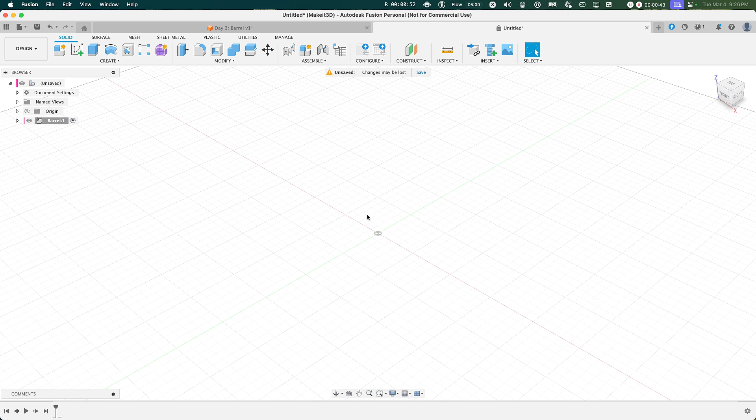So the first thing we need to do here is to create a new component. Let's hover over to the left-hand side, click on Create, New Component, and let's go ahead and name this to Barrel. Press OK. From here, what we want to do is to create a sketch. We're going to go ahead and click on Create Sketch, then select the front plane, and then it's going to reorient us to the front.

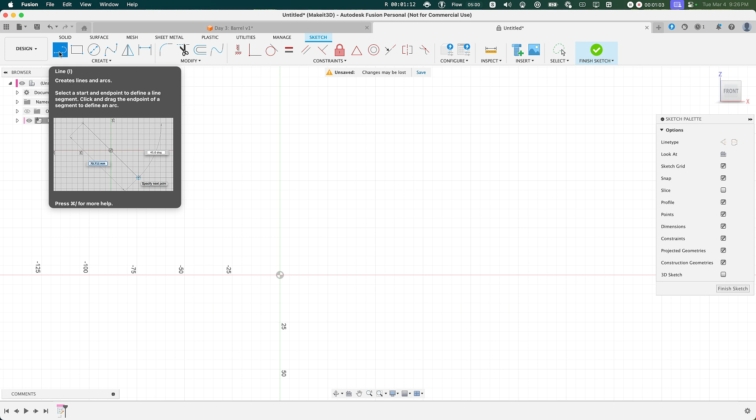From here, we need to create a sketch on the right-hand side. To do that, we're going to press L on our keyboard, or we can hover over to the line section here. By clicking the line command here, we can go ahead and draw from the center and draw it right out to the right-hand side. From here, you should see two values appear, and you can toggle tab on your keyboard to switch between the two. The first value we're going to set is the distance one. We're going to go ahead and set this to 40 millimeters, while the degrees will be set to 0.

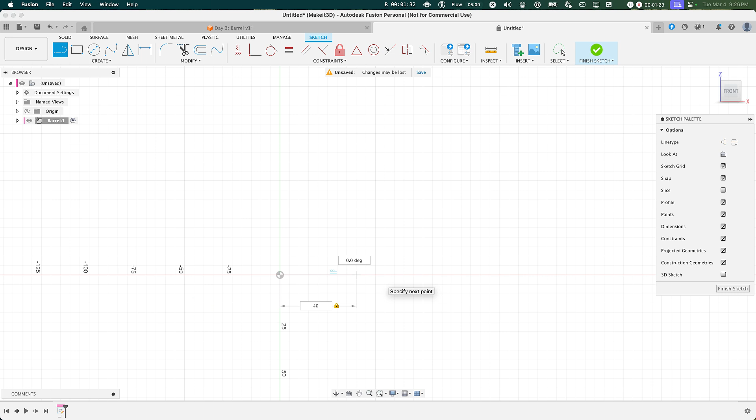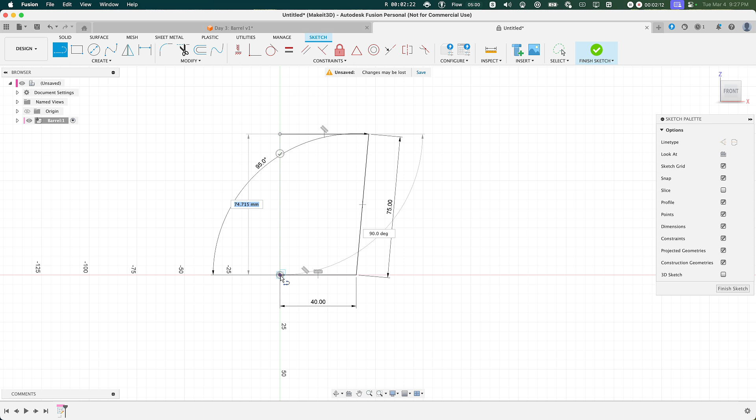Click once on your mouse, and then Fusion is going to prompt you to create another sketch. Let's go ahead and set the distance here to 75, and then set the degrees to 95. Once that's done, let's go ahead and finish this off by closing it off to the left-hand side, then closing off this profile, and now we have a fully sketched out profile for our design.

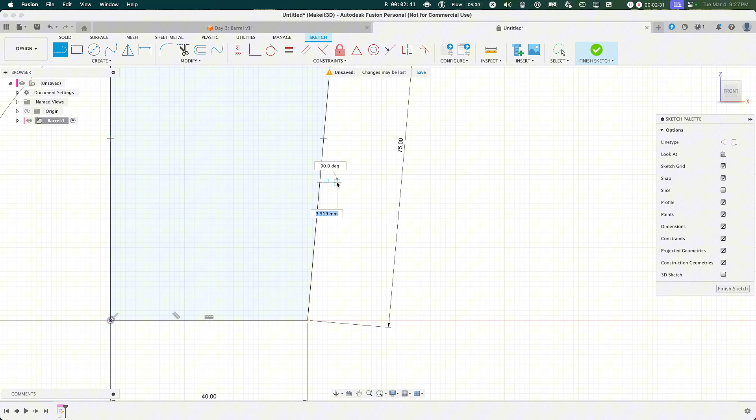The next thing we need to do here is to create these small lips that actually revolve around the cylinder. To do that, let's go ahead and zoom in. And to start, I'm going to go ahead and draw a line. I'm also going to make sure this line also has this right angle feature shown right in the center there. Make sure that's toggled on. Click your mouse, then drag it all the way down, then to the left. Do your very best to match it up as much as you can.

Now with that done, we also need to make sure that this line here, if I were to press escape, matches up with this line here. To do that, we're going to be using the parallel constraint shown on the top menu portion here. Selecting this line here, then this line. Now this line is completely parallel to this line here, and that's what we're looking for.

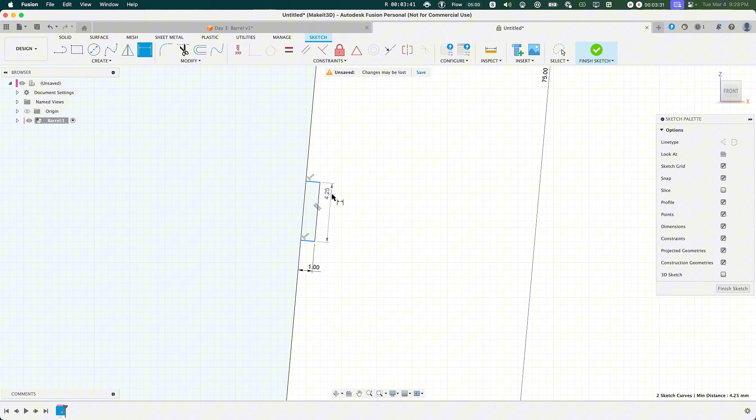Now if you press D on your keyboard, we're going to go ahead and set some dimensional values for this thing here. We're going to set the value from here to here, around 1 millimeter. Pressing D once again, selecting the bottom to the top, clicking, this is going to be 7 millimeters.

Once that's done, let's go on and repeat the exact same process by creating one up top and then one above that. Let's go ahead and create one more at the very top, and it doesn't matter where the placement is. All we're doing is just setting them down. We'll go ahead and dimension this later on. Now from here, you should have a total of 3 lines here, or 3 roundabouts that go around here.

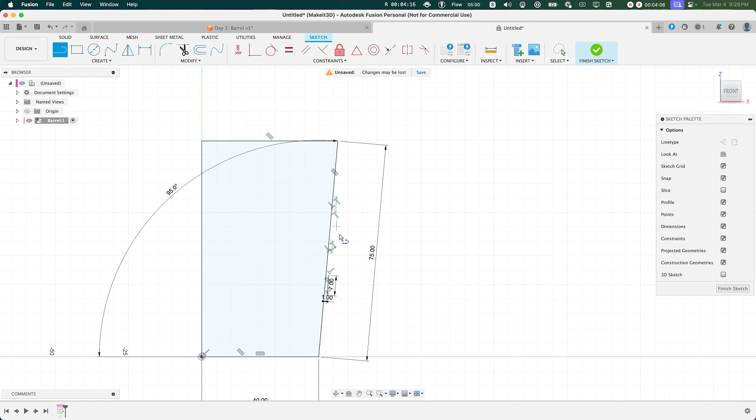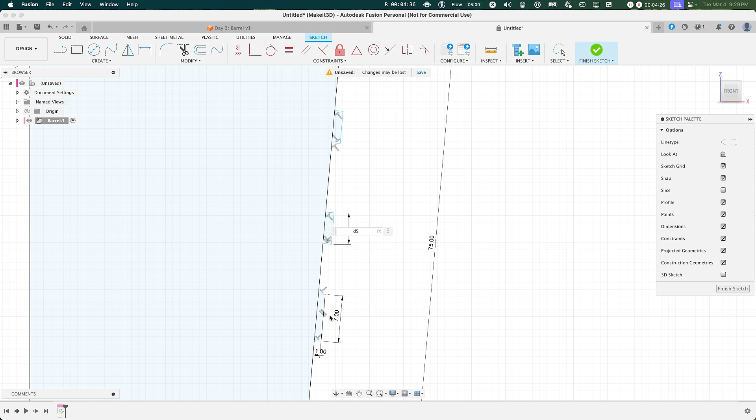Now, one cool thing about Fusion 360 is that you can actually reference different dimensions and use them for other pieces that you're trying to dimension. So for example, if we're to press D on our keyboard and then select this line here, we can actually select the value at the bottom, and then it's going to take the reference from this value and apply it here. So if this were to change to a different value like 9, the top will also change as well. To undo anything you may have changed or modified, you can just press Command Z.

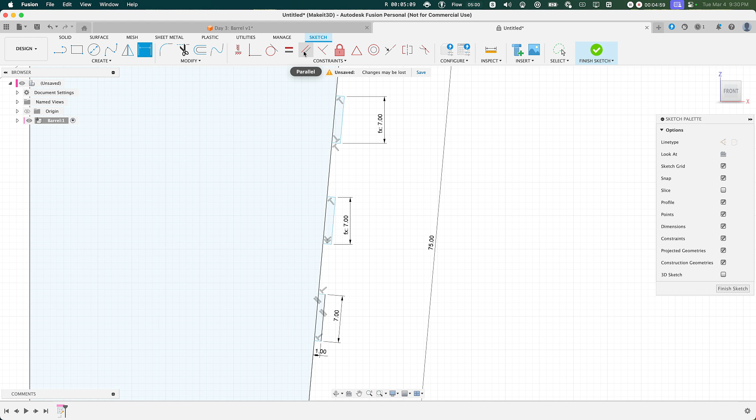Let's also apply the exact same thing to the top one on the very top, selecting the line to the right, then typing in this value here. Press OK. Let's also make sure these lines that we've created are parallel to the line on the left-hand side. And if this error pops up here, that means it's already constrained. So we're already good to go.

From here, let's go ahead and press D on our keyboard. Select the line here to here. Drag it out. And then we can also select this value here. Once again, pressing D on our keyboard.

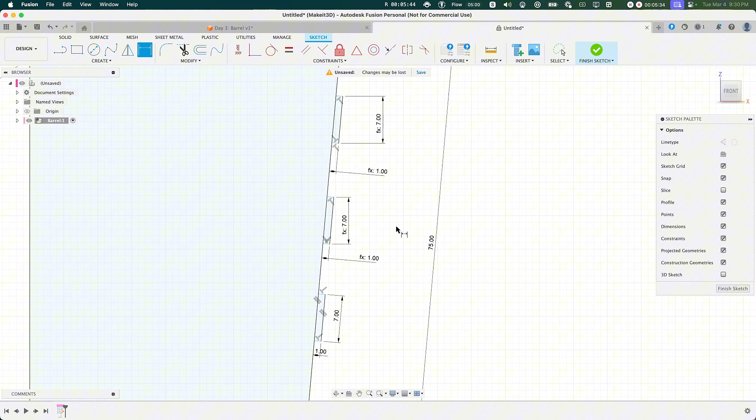Here to here. Drag it out. Selecting this value or the value here. The next thing we need to do here is to make sure these are evenly spaced. To do that, let's go ahead and add a value from here to here, and I'll leave this around 10 millimeters. Next, let's also add one more at the very bottom, and then type in 10.

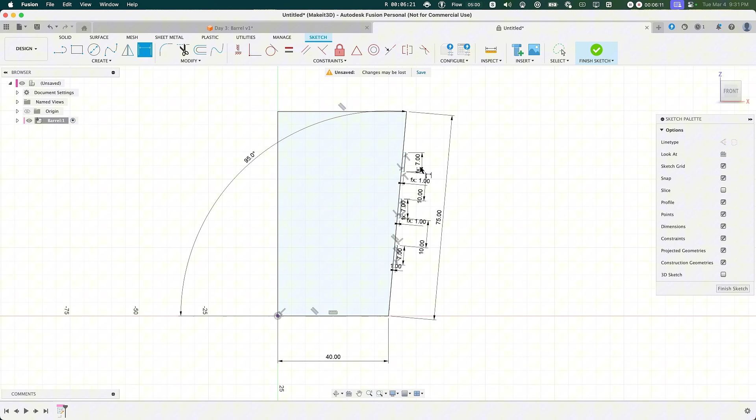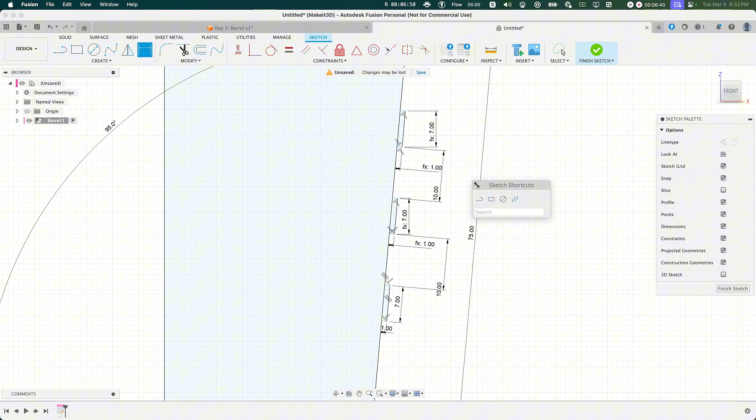Once that's done, you should basically have a profile with 3 smaller profiles here on the right-hand side. To finish this up, we're going to use this feature called Mirror. Now, this feature allows us to mirror these sketches on the left-hand side within the sketch environment. To do that, what we're going to do is press S on our keyboard. This brings up the Sketch Shortcuts menu within Fusion 360, and then type in Mirror.

From here, you'll be presented with 2 options. First one shows it as a half-completed sketch, and this one shows like a profile. Click on the first one. Then from here, we're going to go ahead and select and double-click these lines here. We'll also select this one here and this one here.

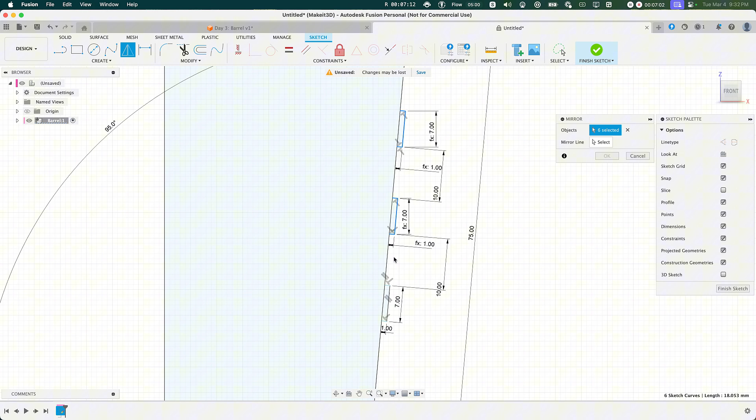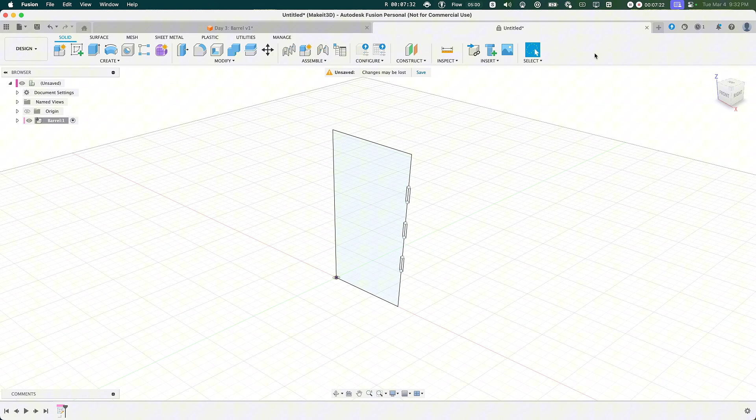And then on the dialog box on the right-hand side, the mirror line will be chosen, which will be what is presented here. Now, I'll explain why this is important later on, but this is something that we will need to wrap around the entirety of our design. From here, let's go ahead and finish this off by clicking on Finish Sketch, then pressing S on our keyboard. This brings up the Design Shortcuts menu, and what we're going to do is press Revolve.

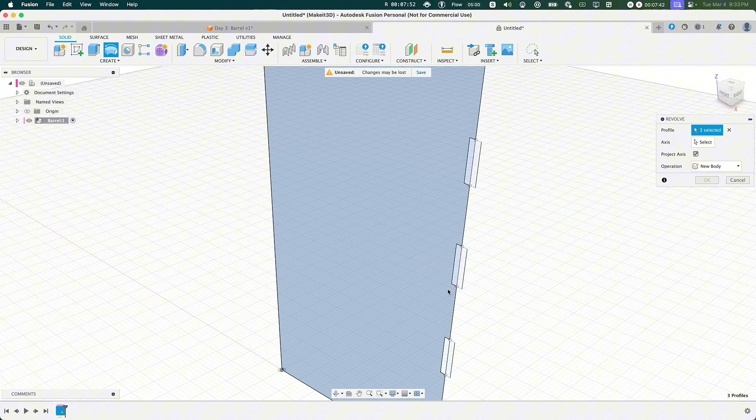Now, there's going to be 2 options that appear on the screen. What we want to do is select the first one. Now we want to select the profile, as well as the 3 profiles that we have here. Select the axis, and let's finish this off by selecting the middle axis. Once that's done, make sure the operation is set to New Body and press OK.

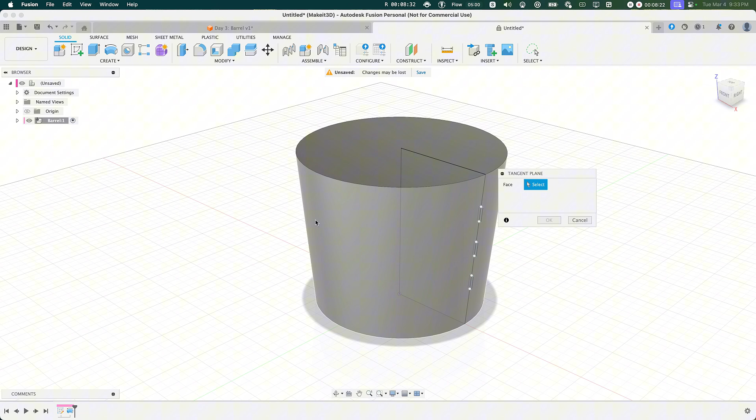Now with all that done, let's go ahead and finish this up by pressing S on our keyboard, typing in plane. What we're going to do now is create those little lines that appear within the center of the barrel. These lines appear throughout the entire curvature of the barrel, so that way it gives it that rustic kind of wooden look. To start this, let's select the face after selecting tangent plane. We're going to select this cylinder here. It's automatically going to populate a plane here.

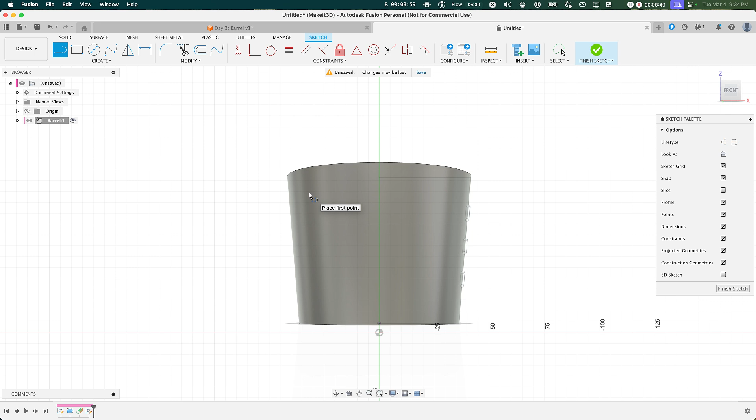Since we cannot directly edit on a face that's curved, we need to create a plane so we can actually start a sketch. To start this, let's press OK. Then click on Create Sketch, selecting the front plane, and then zooming right in so that way we get a better look. From here, I'm going to create a line from the center by pressing L on our keyboard, then selecting the origin and dragging it all the way above. Now, it doesn't matter how high you're dragging this. All we're doing is just setting the line above the cylinder itself.

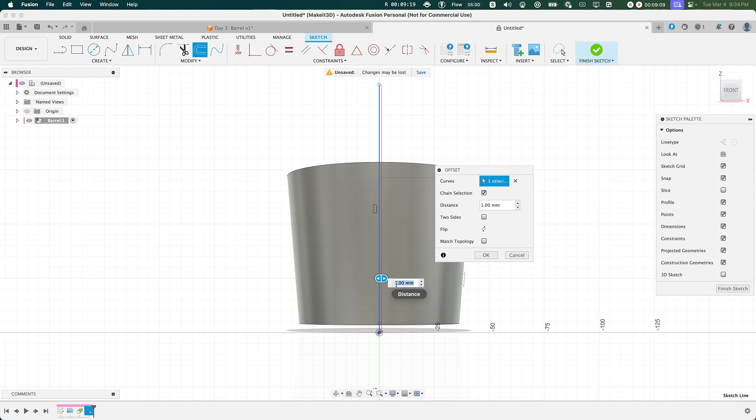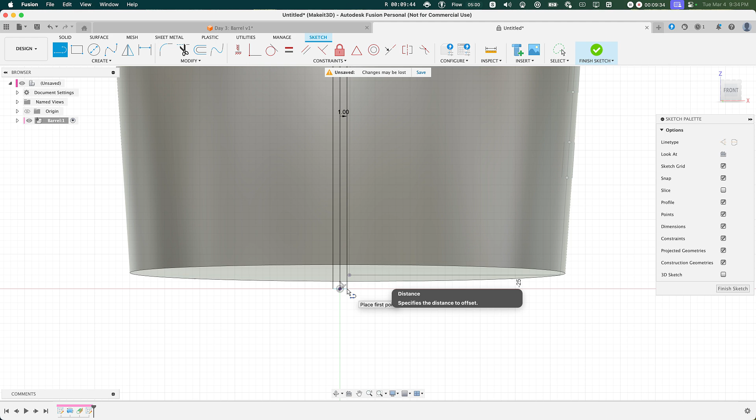What we're going to do now is create another one by pressing O on our keyboard, selecting the line, setting the distance to 1 millimeter, and press OK. Let's repeat the exact same thing on the other side, pressing O once again, selecting the line, typing in -1, and press OK. From here, we're going to close this off into a profile. To do that, let's press L on our keyboard, closing off these 2 dots at the bottom, as well as the same exact thing on the top. Finish sketch once you're done.

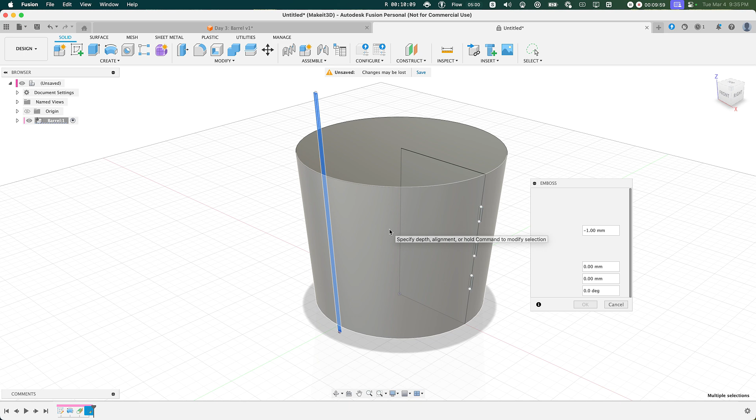And now we're going to press S on our keyboard, type in Emboss, and this allows us to select a profile that we just created and emboss it onto our cylinder. From here, we're going to select these 2 profiles that we just created, select the face. The face is the cylinder that we just made, and make sure the effect is set to Deboss. Set the depth to -1 millimeters and press OK.

With that done, we can toggle our component, toggle on sketches, then turn off sketch 2. From here, you can see we still have our profile shown on the right-hand side, plus this newly created emboss that we created for the product. Now, don't worry, we're going to wrap this around the entirety of our design. To do that, we're going to press S on our keyboard, type in circular pattern. Then from here, you can see a dialog box show up.

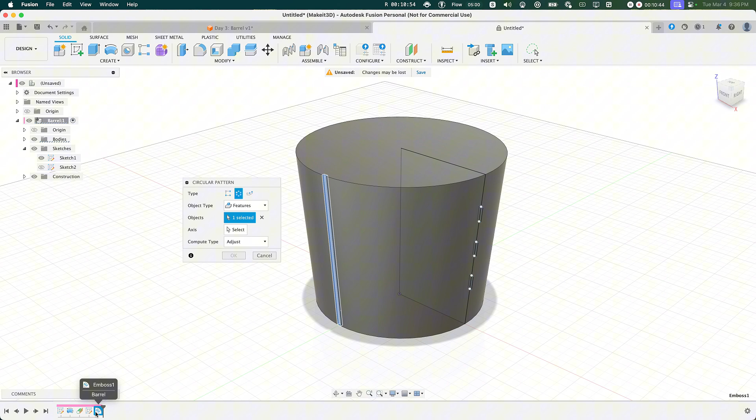The next thing we need to do here is set the object type to features. By selecting features, this allows us to select one of the features within our timeline and use this as a reference, or what we want to copy. For the axis, we're going to select the top edge shown on this cylinder here. We can also select the bottom or the top, it doesn't matter. But what we want to do is just increase the quantity shown on the left-hand side here. By doing this, we can increase this, and more of these lines start to populate.

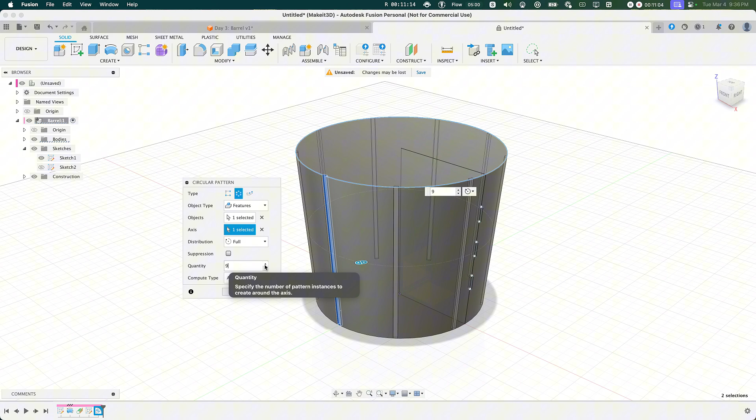I'm going to go ahead and add 10 and press OK. Once that's done, turn off our sketch, and as you can see, we have the lines all around our barrel here. If you're not happy with the amount of lines you've added, you can double click on the circular pattern once again and decrease the value or quantity to get your desired look.

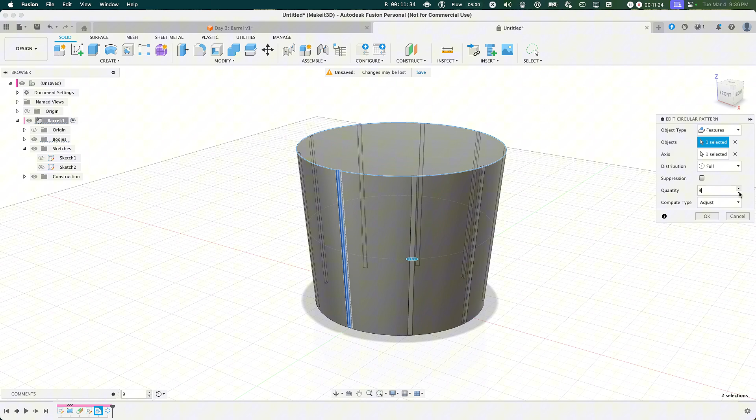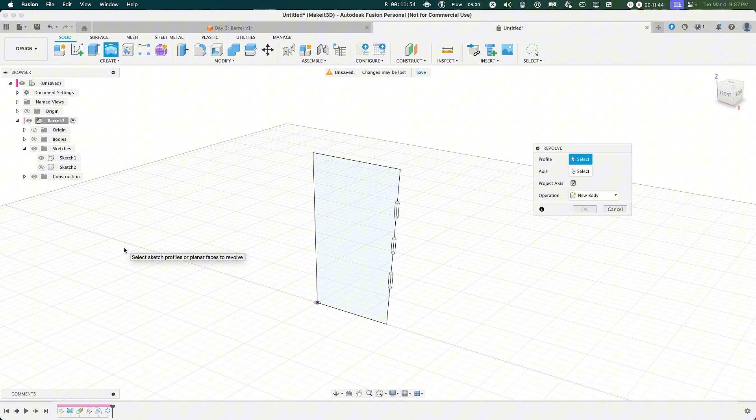From here, we need to turn on Sketch 1 once again. Then we're going to use the revolve feature to revolve this all around. To do this, press S, type in revolve, and turn off our bodies for now. Then zoom right in, select this profile, then this one, as well as the two on the bottom.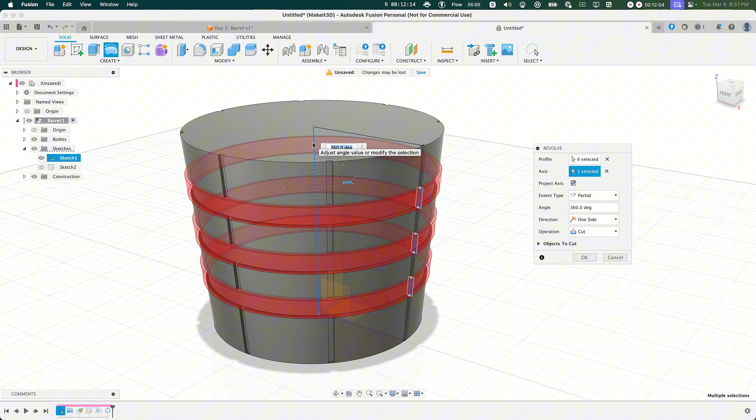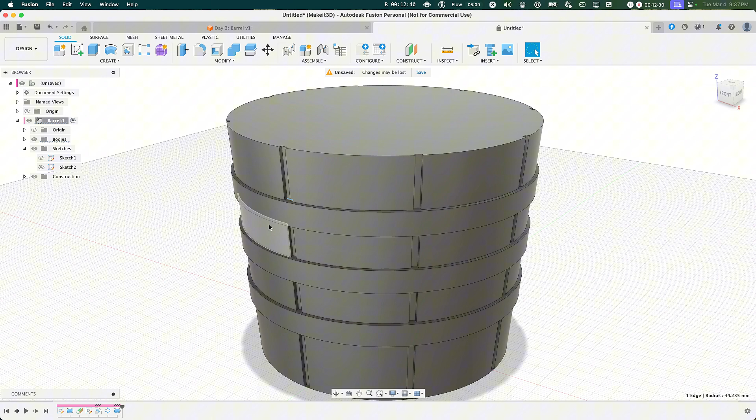Then we're going to turn our bodies back on, select the axis. The axis we're going to select is the Z axis, and then set the operation to join and press OK. Now, if you turn off Sketch 1 - the reason why we did this is because if we added the lines here after adding this revolve on this side that goes along the barrel, you would have a cut inside in the middle. So we added this thereafter so we can have it wrap around without a hole in the middle. To finish this off, press S on your keyboard, type in shell.

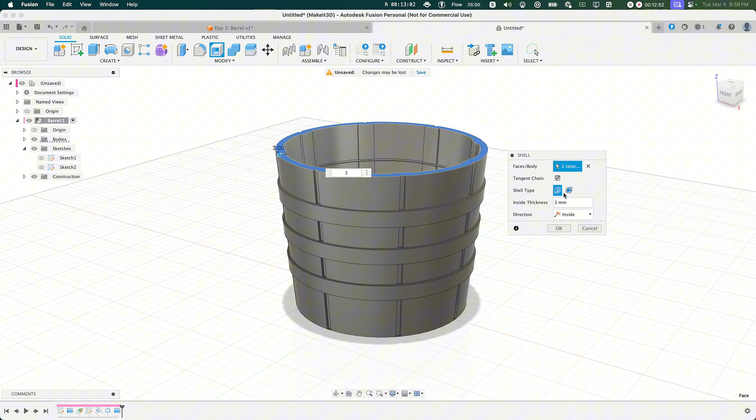Then we can select the top face here. We can shell this in to, let's say, around 3 millimeters, and also set the shell type to rounded shell. Additionally, you can increase the inside thickness to, let's say, 5, so you get a bit more of a solid look. You can play around with these values to get a desired look. Once you're happy, press OK.

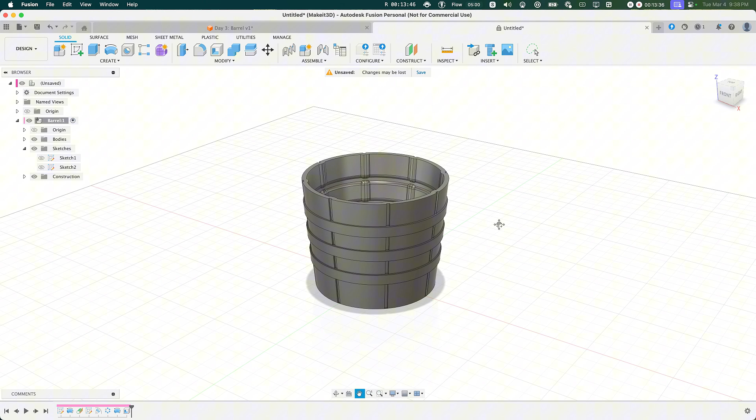Now what we can do is add some color to give it a bit more style. To do that, press A on your keyboard, then select the appearance tab on the right-hand side. Search within library and type in brown. Then select the matte feature and drag it onto our bodies. Now we have a brown sort of color within our barrel shown here.

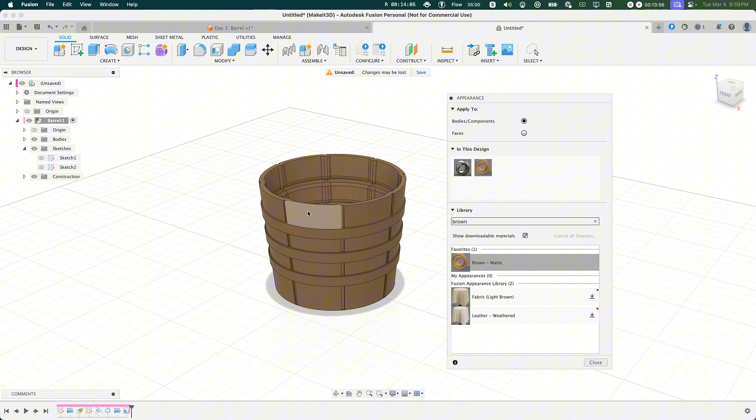Additionally, if you want to add color here, you can set the faces and add the color to wherever you want. Now we're giving this a little bit more color, design, and features.

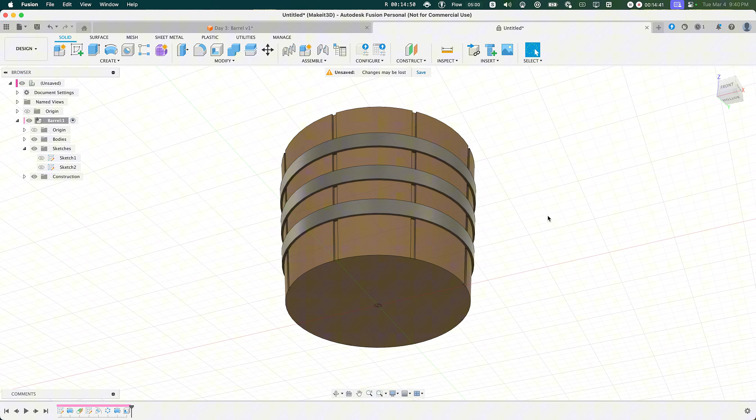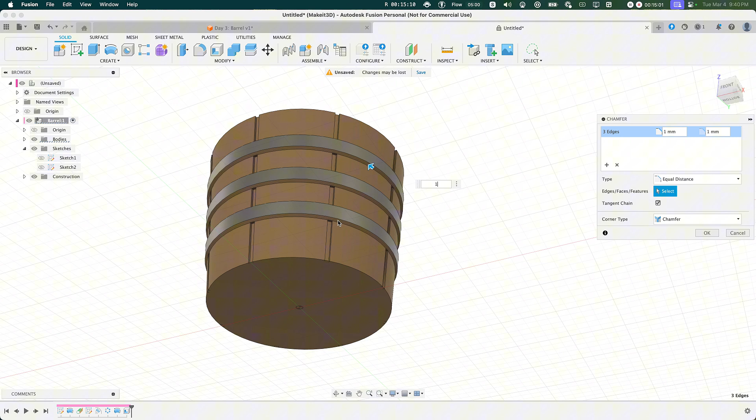Now with your design nearly complete, the next thing is to add a chamfer underneath here. The reason is because if we were to 3D print this, it would require supports, and we're trying to minimize or not use supports at all. To do this, press S, type in chamfer, then select these edges here. We're also going to set the value to, let's say, 1 millimeter, so it curves along the edge, giving it a nice 45-degree angle, so we don't need any supports for our 3D printed design.

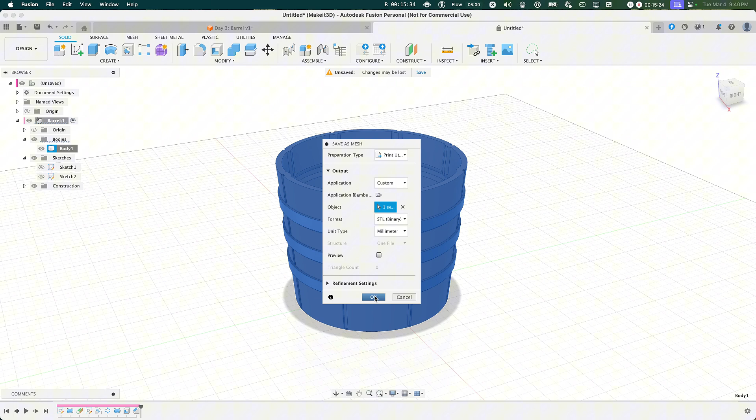To export this to your slicer, hover over to Bodies, right-click Body 1, save as Mesh, then open it up within your Print Utility menu, press OK, and by default, Bambu Studio will automatically open up this design ready to go and ready to be 3D printed. But I have to mention this will be without the color, as I already pre-colored it before starting this video.

So with that said, we pretty much wrapped up today's tutorial, and in this tutorial we completed how to design this 3D printable barrel within Fusion 360.